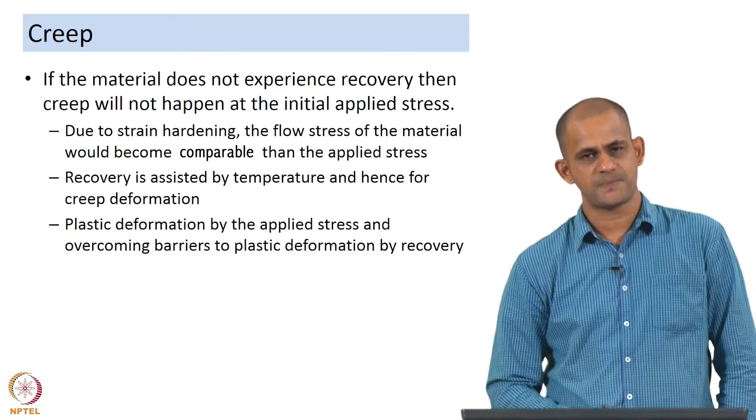Now, one of the earliest studies on creep, the time dependence of strain, was carried out by Andrade. Andrade was trying to understand the time dependence of plastic strain, and what he found out was whenever a material is subjected to a certain load, initially there is some instantaneous strain, then some initial flow which gradually disappears, and finally the material experiences elongation under constant flow conditions. Based on these observations, he proposed the following equation.

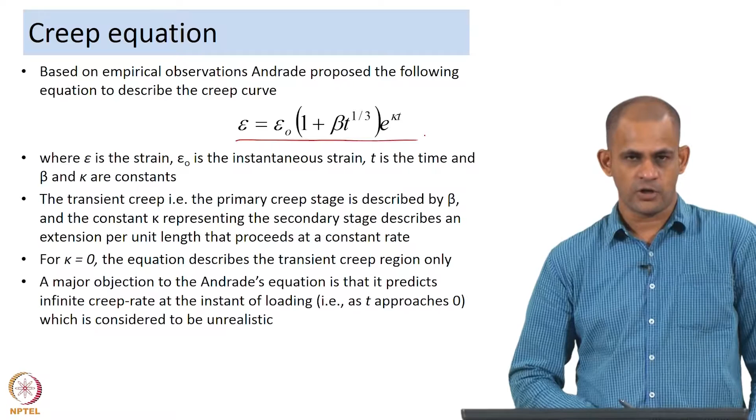Here in this equation, epsilon is the creep strain, the plastic strain that the material is experiencing, epsilon naught is the instantaneous strain, the strain the material experiences right on the application of the stress, T is the time or duration of creep, and beta and kappa are constants. Now, if you recall, a creep curve has an instantaneous strain, a primary creep region, a secondary creep region, and then failure in the tertiary creep regime. But in Andrade's experiments, he only looked at the instantaneous strain, the primary creep region, and the steady state region.

In his equation, the transient or primary creep stage is described by the constant beta, and kappa represents the secondary creep stage, where extension per unit length proceeds at a constant rate. If kappa is equal to 0, the curve will be limited only to the primary or transient creep region. While this was one of the earliest equations to describe creep, there were objections raised to Andrade's equation, and one major objection is that it predicts infinite creep rate at the instant of loading, that is, when t approaches 0 the creep rate approaches infinity, which is considered unrealistic.

So, the way to look at it: if you write epsilon = epsilon naught (1 + beta t^(1/3)) e^(kappa t), then epsilon can be written as epsilon naught e^(kappa t) + epsilon naught beta e^(kappa t) t^(1/3). So d epsilon/dt, which is epsilon dot, becomes kappa epsilon naught e^(kappa t) + beta epsilon naught (kappa t^(1/3) e^(kappa t) + 1/3 e^(kappa t) t^(-2/3)).

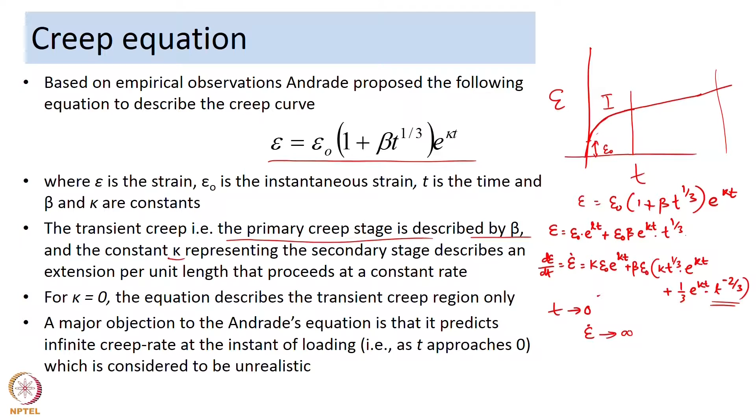In subsequent years, Garofalo proposed the following equation to describe the creep curve, and this equation was supposed to overcome the limitations of Andrade's equation. In this equation Garofalo proposed that epsilon is equal to epsilon naught, and then there is a primary creep term and there is a steady state creep term.

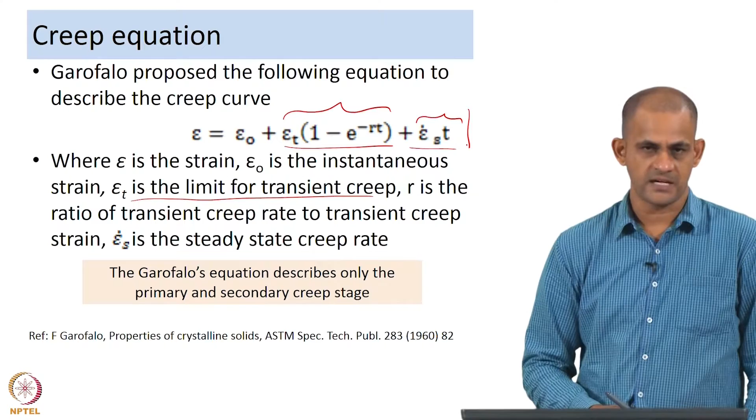Here epsilon is the creep strain, epsilon naught is the instantaneous strain, epsilon t is the limit for transient creep or the primary creep region, r is the ratio of the transient creep rate to the transient creep strain, and epsilon s dot is the steady state creep rate. However, what is very clear from this equation is that the Garofalo equation describes only the primary and the secondary creep stage, and it does not say anything about the tertiary creep stage.

However, an extension of the Garofalo equation can be made to include the tertiary creep regime, and this was done later by Evans and Wilshire, who showed that the creep curve could be described by the following equation. You could have epsilon is equal to epsilon naught, and up to this point it is the Garofalo equation, and then they added an additional term for the tertiary creep regime. Here epsilon L, the new term they introduced, is the smallest strain deviation from the steady state at the onset of tertiary creep.

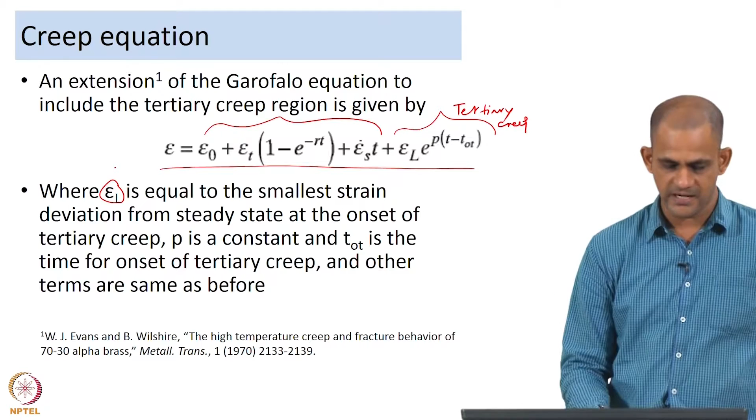So, if you look at the curve epsilon versus t, it is the smallest strain that takes the material away from steady state. If this is the extrapolation of steady state, the smallest strain deviation which takes the material away from steady state into tertiary creep, that is what epsilon L is, and p is a constant and TOT is the time for onset of tertiary creep. Probably somewhere around here this will be TOT, and the other terms are the same as before.

However, there are other kinds of creep behavior and creep equations that people have observed. One such creep equation is the logarithmic creep equation. Epsilon is equal to epsilon naught plus alpha ln of 1 plus gamma t, where alpha and gamma are constants. What this equation suggests is that the strain rate of deformation slowly tends to 0 at long durations, and this kind of equation is useful for describing exhaustion creep. That is very clear if we take this equation, epsilon is equal to epsilon naught plus alpha ln of 1 plus gamma t.

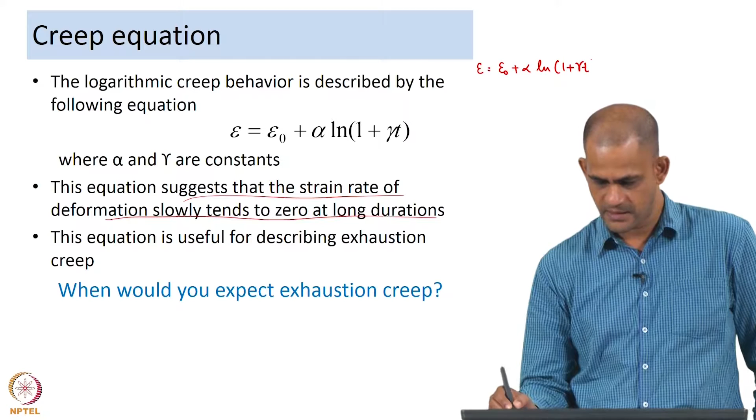So, d epsilon over dt is equal to alpha over 1 plus gamma t into gamma, which becomes alpha gamma by 1 plus gamma t. So during logarithmic creep, the strain rate of deformation is alpha gamma by 1 plus gamma t. When t is very large, the denominator becomes very large, so epsilon dot decreases and tends towards 0. If t tends to infinity, then epsilon dot tends to 0.

This kind of behavior is also known as exhaustion creep behavior, and the point is when would you expect exhaustion creep. If you plot epsilon dot versus t, you eventually see epsilon dot tending to 0, and one could expect this behavior under creep conditions where the temperature is low. If your temperature is low, the material will not be able to recover. Since creep involves a competition between mechanisms of strain hardening and mechanisms of recovery, if the material is unable to recover, because of strain hardening the flow stress of the material exceeds the applied stress, and at that point the material will stop creeping or the creep rate would tend towards 0. That is when you would expect exhaustion creep.

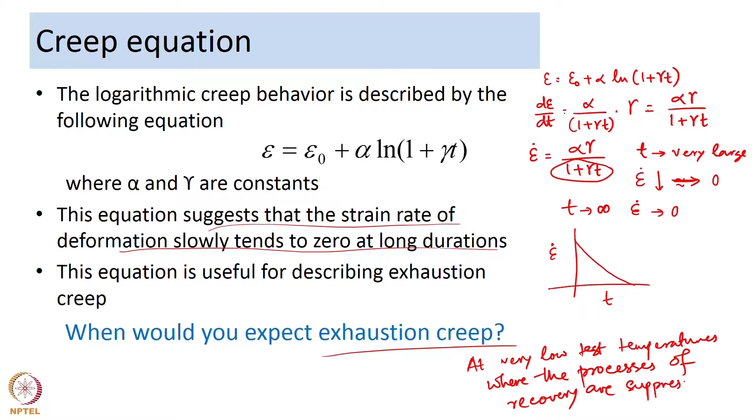So, exhaustion creep can be expected at very low test temperatures where the processes of recovery are suppressed. So, we looked at 3 equations: Andrade's equation, Garofalo's equation, and exhaustion creep, which is the logarithmic equation. The question that arises is, what is the basis of the creep equation?

Well, Andrade used an empirical approach to come up with his equation. He relied on the experimental observations that he made during his creep tests, and based on those observations he came up with his equation. Whereas Garofalo proposed his equation considering substructural changes occurring during creep deformation and by considering creep as a first order kinetic reaction. So, Garofalo looked at creep as a first order kinetic process, and based on that he suggested his equation. Now, what is a first order kinetic reaction?

Well, in a first order kinetic reaction, the rate of the reaction is directly proportional to the concentration of the reactant. So, if you have a reaction like this going on, A plus B giving rise to C plus D, where A and B are the reactants and C and D are the products, then the rate of the reaction, if it turns out to be of this form.

So, if dA over dt, which is the change in concentration of A, turns out to be directly proportional to the concentration of A itself, then that is known as the first order kinetic reaction. Of course, there is a negative term here. The negative term implies that the concentration of A is decreasing with time. So, when you have something like this, that is known as the first order kinetic reaction.

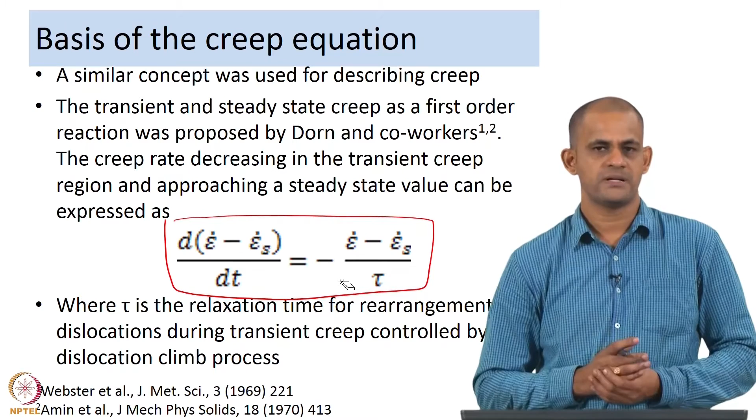So, this is basically the equation, where epsilon dot is the instantaneous creep rate and epsilon s dot is the steady state creep rate. If we use this equation, we will be able to derive the entire creep equation. So, let us go through the derivation and find out how it leads us to Garofalo's equation. If we take d(epsilon dot minus epsilon s dot) by dt is equal to minus (epsilon dot minus epsilon dot s) over tau. So, this is the first order kinetic equation.

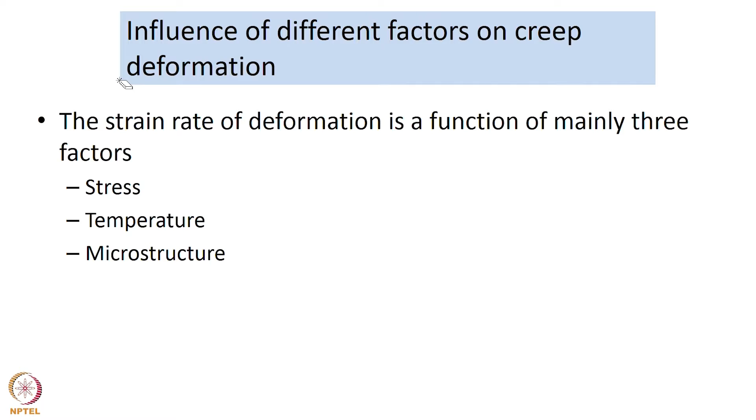So, this implies d epsilon... that is equal to minus 1 by tau dt. And now, if we carry out integration of this, that will lead us to ln of (epsilon dot minus epsilon dot s) is equal to minus t by tau plus some constant k. So, this implies epsilon dot minus epsilon s dot is equal to e to the power minus t over tau into e to the power k.

And tau, as I mentioned, is the relaxation time for rearrangement of dislocations, and 1 over tau can also be written as r, which is the rate of exhaustion of transient creep. So, this implies epsilon dot minus epsilon s dot is equal to e to the power minus r t into e to the power k. So, this implies epsilon dot is equal to epsilon s dot plus e to the power minus r t into e to the power k.